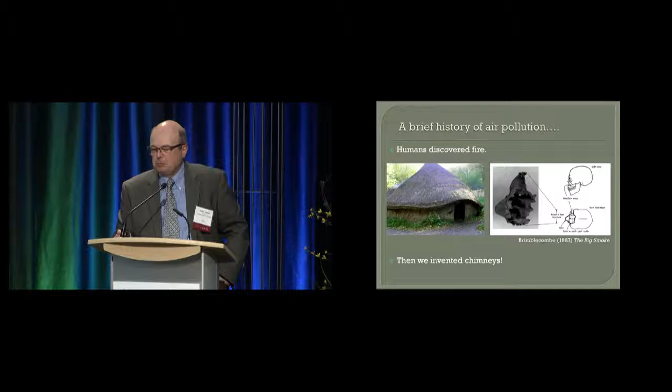Humans got a little bit more experience, and they realized maybe we should invent a vent for this smoke, a chimney, and they let the smoke outdoors. And so things improved in terms of the indoor environment. I think maybe as a species we missed breathing smoke because one of our next inventions a little bit later was cigarettes. Maybe not our finest moment.

Studies of this period that lasted several days suggest in excess of 4,000 extra deaths occurred due to the air pollution during this period. This was not the only event. There were others, including an event in the small town of Donora, Pennsylvania, here in the U.S., that was a similar sort of thing, but on a smaller population scale. And these were really a wake-up call to address urban air pollution and our exposure to that air pollution.

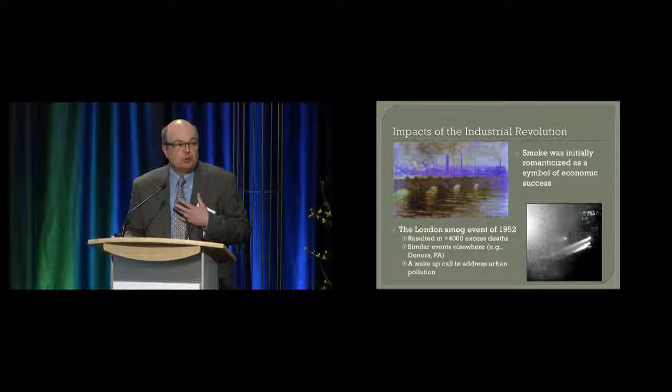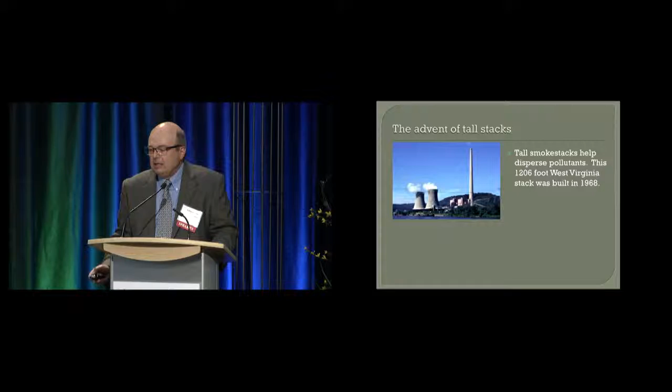This really did help to clean up air pollution in our cities, but it wasn't long after that till we started to realize that we inadvertently changed these local air pollution problems to long-distance regional air pollution problems. Last week I was in upstate New York at the International Acid Rain Conference. There was a lot of talk about the discovery of acid rain in Scandinavia and later the northeastern US and Canada in the late 1960s into the early 1970s.

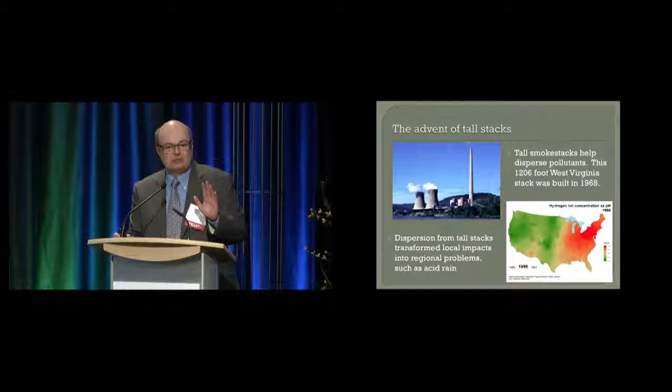And this came about primarily because we were taking this sulfur dioxide from the coal-fired power plants, distributing it over long distances. It reacts in the atmosphere to make sulfuric acid. It's deposited into ecosystems far downwind of the source. It acidifies lakes, it damages forests, and so forth. So at this point, we realized that we couldn't simply invent better chimneys. We needed to address sort of the root cause of air pollution.

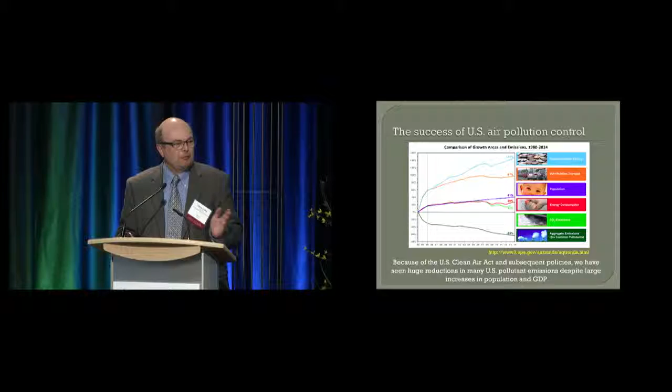So this has really been a tremendous success story in terms of improving air quality in this country, and there's very similar progress in Europe. I work a lot in China, and these days I can tell you they're on a different part of this curve, but they're going to get there too. They're starting to address some of these issues.

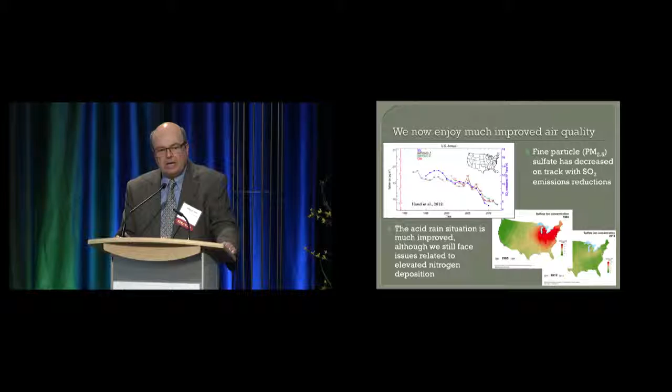And we do a lot of work with the National Park Service, and after all, when you go to a national park and you pay your entrance fee, you want to see what's there. And so they spend a lot of time trying to understand this and how to improve visibility for their guests.

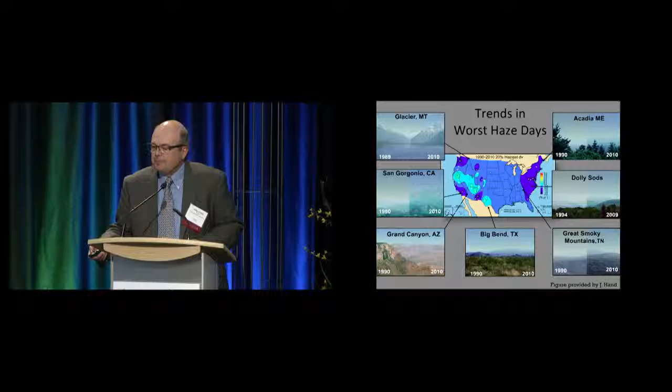So we've come a long way in terms of thinking about air pollution, and now not only do we not ignore it, it's actually a marketing tool, right, to have things be green. Especially the younger generation is really thinking about this when they're buying products. But we've seen recently some examples maybe of how not to do this. You don't want to advertise being a really green company and then you find out that maybe there was some cheating going on. And, you know, Volkswagen faces a really difficult problem now in terms of their future because they've relied so heavily on this investment in clean diesel and didn't go about it in the right way.

So that's a very brief introduction to sort of the context of how air pollution has evolved and our thinking about it has evolved. We thought a lot about conventional sources like coal-fired power plants and more recently motor vehicles. Now we're really getting to what I call the unconventional sources. And those include things that tend to be more distributed like agriculture, like wildfires, like oil and gas production, which is something that's increasingly of concern.

These are sources that are much more dispersed. There are lots of individual points of release, and we don't understand the emissions as well as we can measure, for example, coming out a single stack of a coal-fired power plant. So let's think about natural gas and what are some of the advantages and some of the potential concerns about its production and use.

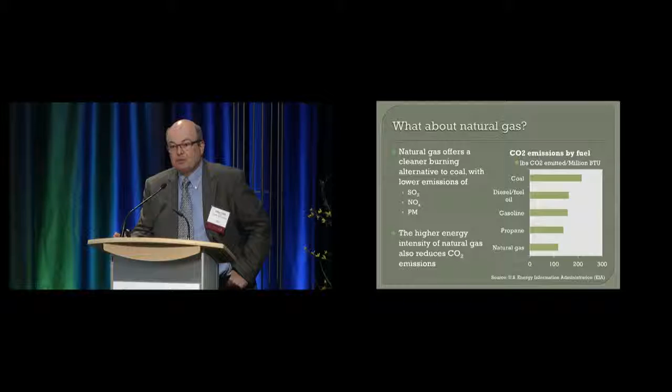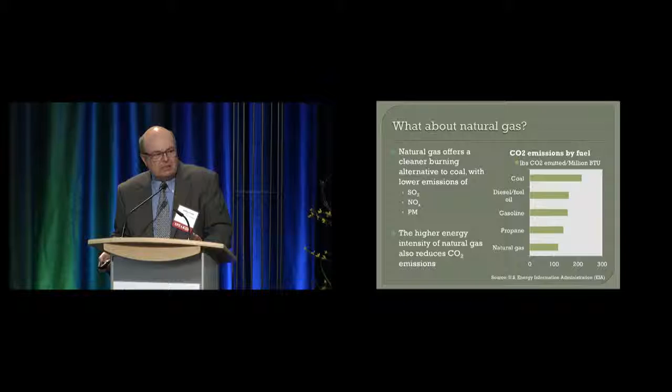Well, I don't think you would find many people that would argue about its advantages as a fuel in terms of burning very cleanly. It produces many fewer emissions of things like sulfur dioxide and fine particulate matter, or PM. Because the natural gas, the methane molecules are very energy rich, they also, when you burn them, generate less carbon dioxide than other sorts of fossil fuels. And you can see a comparison there on the right. So it's an extremely nice fuel as fossil fuels go in terms of its clean combustion.

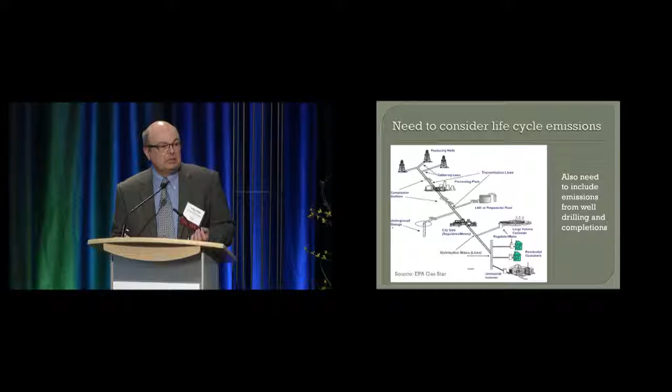But we need to think more than just the end use. We need to think about sort of the life cycle of emissions. And Rebecca talked about some of these stages up front with the drilling and the completions. And then this diagram on the left from the EPA Gas Star program shows you some of the other processes along the way from production to transmission, processing, and distribution to customers at the end of the chain. So all of these are potential points that we need to think about in terms of possible air quality impacts.

So what kinds of things might we be looking at? I'm going to break these down into a few groups. One is things that might affect climate, and in particular I'm going to focus on methane emissions. Methane is, of course, the main constituent of natural gas. It's also, as you'll see, a strong greenhouse gas, so it has a lot of potential concerns if it's leaked to the atmosphere.

I'm not going to say as much about black carbon. We don't see as much flaring here as a lot of places. We've worked up in the Bakken in North Dakota. There's a lot of flaring. You see a lot of soot coming off of those flares. Soot is also a concern from a climate forcing perspective.

I'll say a bit about what we call criteria air pollutants. These are things that are regulated by the EPA in the U.S. because of their human health effects. And in particular, we'll talk about ozone and about fine particles, which we call PM 2.5. That's particulate matter with an aerodynamic diameter less than 2.5 microns. Just think fine particles.

And then I'll say a little bit about hazardous air pollutants or air toxics. Here we're thinking about things like particulate matter from diesel combustion, different VOCs, those are volatile organic compounds like benzene, other related aromatic hydrocarbons, formaldehyde, and in some places hydrogen sulfide can be a concern, but I'm not going to really talk about that today.

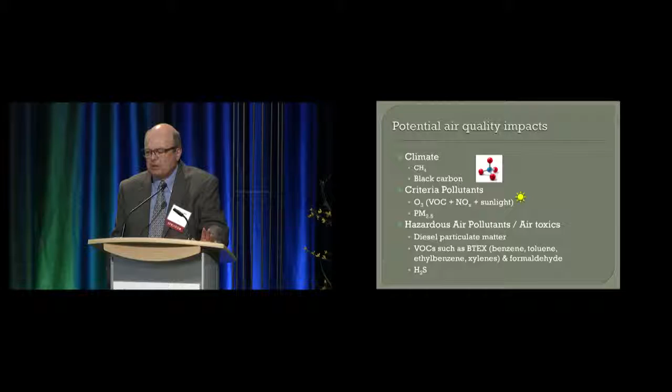So let's start with climate and focus on methane. I mentioned already that methane is a much more potent greenhouse gas than carbon dioxide. This is because it absorbs a lot more infrared radiation per molecule than carbon dioxide does. If you look at a 100-year reference time frame, the global warming potential of methane is approximately 23 times that of carbon dioxide. So when we burn methane as a fuel and convert it to carbon dioxide, it's efficient. But if we're leaking methane along the way from drilling to production to transmission, we could offset that potential benefit in terms of this being a cleaner burning fuel from a climate perspective.

You're going to hear tonight from Fred Krupp from the Environmental Defense Fund. They've been a real leader in organizing research on trying to understand the leakage rate of methane in different parts of the system that we saw a moment ago. Ramon Alvarez of EDF led a really nice paper a couple of years ago that looked at the leakage rate versus the years to climate benefit for fuel switching. For example, for a coal-fired power plant to replace that with natural gas, or a diesel vehicle or a gasoline-powered vehicle. And these figures here show you some information about that based on his estimates.

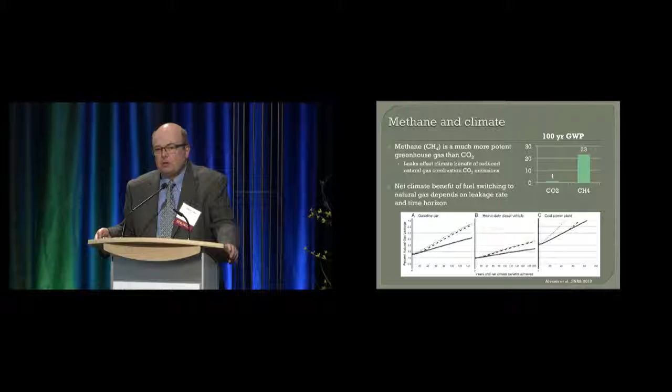And what they show is that at the left side of these figures, at the y-intercept, that tells you how low the leakage rate has to be for an immediate benefit to switching from, say, coal to natural gas. And as you look to the right, moving out, these are at different time horizons. So what this really does is raise questions about, well, what are acceptable leakage rates in terms of a climate forcing perspective for a fuel switch from one fossil fuel to natural gas in different applications. So this has been a real focus of attention over the last few years, trying to better understand those leakage rates. People have gone out and made a lot of measurements of this in the field to try and understand it.

They've used, and you'll hear these terms, bottom-up approaches and top-down approaches. A bottom-up approach is where you go out and you try and measure, sometimes even down to an individual component scale, but maybe a facility scale, and you basically add these emissions together to try and come up with the total, and you compare them to some estimate, or what's called an emissions inventory of methane from these activities.

A top-down approach is a complementary approach where you literally try and look at the concentrations, for example, in the atmosphere, and use those to come up with what the emissions had to be to produce those concentrations. So, for example, you might fly an aircraft over a basin like the DJ and look at the upwind and the downwind concentrations of methane and try and figure out how much methane was emitted in that basin. That gives you sort of a top-down constraint on the total emissions.

Now, of course, natural gas production is not the only source of methane. In Weld County, for example, we have a lot of livestock feeding operations. So there are some issues to sort out in these top-down approaches as well. Some of my colleagues here at CSU have been very involved in these methane emission studies with EDF. You'll hear more about those tomorrow in one of the panels. But I just included here one example.

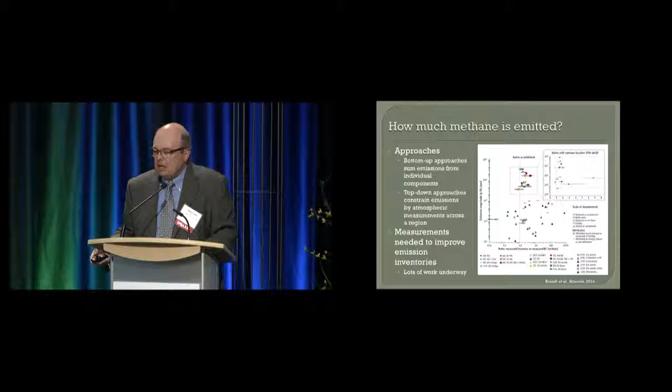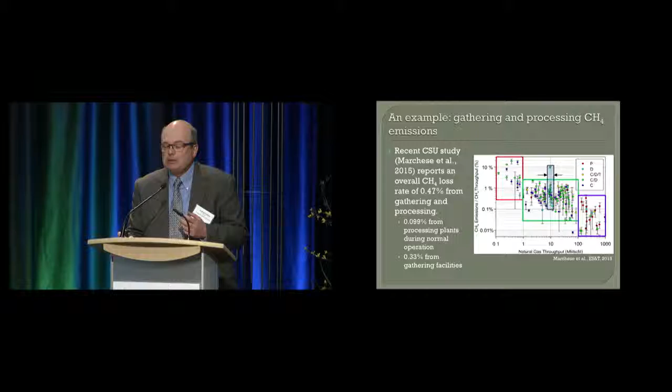And they found out in the end that there's about 0.5% of the total throughput that is leaked from the combination of gathering and processing of natural gas. And most of this actually looks like it's coming from the gathering facilities, less from the processing facilities, and that gives us an opportunity to think about maybe where to target tightening up emissions if we want to bring those leak rates down in the future.

You have volatile organic compounds which are attacked and react in the atmosphere, and they produce free radical species that react with nitric oxide to convert it to nitrogen dioxide, which the sun can then break apart and generate atomic oxygen, which reacts with O2, the oxygen we're all breathing, to make ozone. And it's really the coupling of these cycles that can generate very high concentrations of ozone.

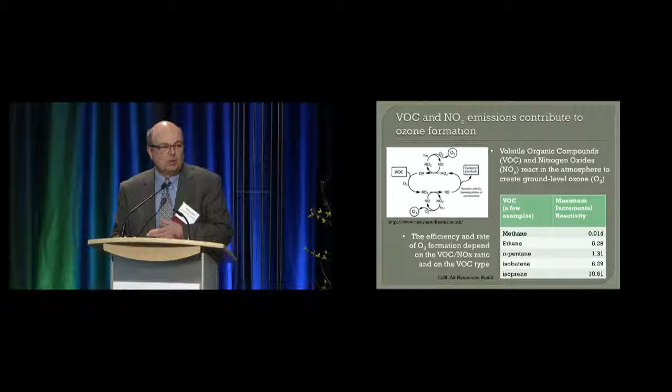So when we think about sources of VOCs to the atmosphere and how they affect ozone, we need to think about not only the amount of those VOCs being released, but also their composition, which affects how much they contribute to the ozone chemistry. If you go around and you take a look at different air basins and look at the VOCs that are present there, you can get an idea about the influence of different types of sources.

We know, although we don't understand fully yet the extent, that these VOCs and the NOx that come from oil and gas production and use contribute to ozone production. We don't know exactly how much that is, and that's a very active area of research. Some of you might have seen the summer before last a lot of aircraft flying very low over the Front Range. You wondered what those were. Those were research aircraft that were trying to study this issue about ozone production from all different kinds of sources here on the Front Range.

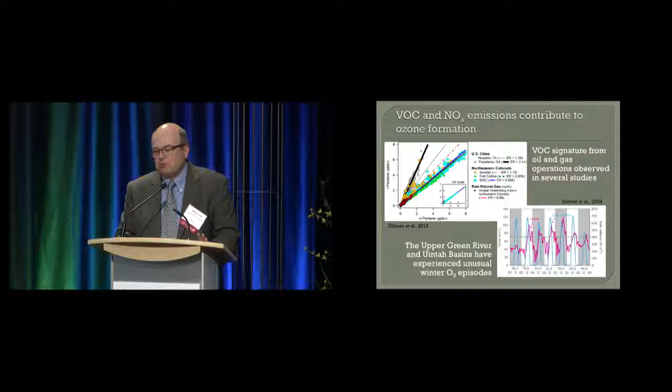There are some areas where we have very clear evidence of strong impacts of oil and gas production on ozone. One is in the Upper Green River Basin in Wyoming, where there were severe winter ozone episodes. This is a region without many people, but in the winter you have a very shallow mixed layer. You have snow on the ground, you have sunlight, and so you trap the emissions very close to the ground. You have reflected sunlight, which almost doubles the illumination, and you drive a lot of this photochemistry very quickly, and you can generate high ozone concentrations as shown in this diagram.

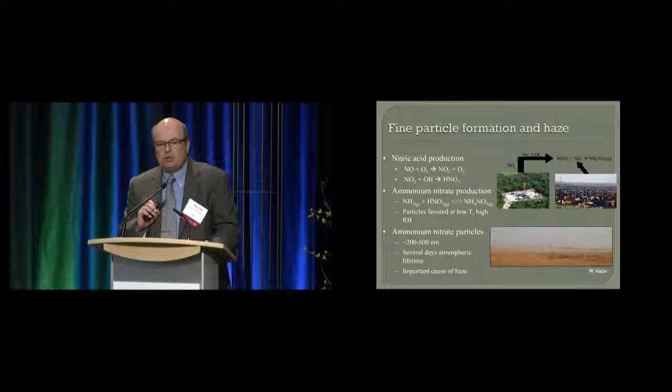Another issue that is of concern potentially is the formation of fine particles. These, remember, are damaging to human health, but they also impact things like visibility in the atmosphere. One of the main areas of concern is emissions of nitrogen oxides. Those can react in the atmosphere to make nitric acid. These are both gas phase compounds. But the nitric acid can react with ammonia, which comes mainly from agricultural sources.

Ammonia is also a gas phase compound, but when it reacts with nitric acid, we make small particles, smaller than a micron in diameter. These have very long lifetimes in the atmosphere. They're very similar in size to the wavelength of visible light, which turns out to mean that they are very effective at scattering light and reducing visibility. So you can see, for example, here this photograph from the Bakken region of this haze that's sitting over that region in the wintertime.

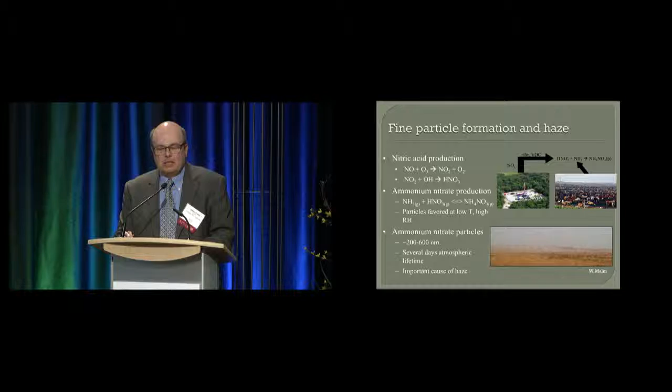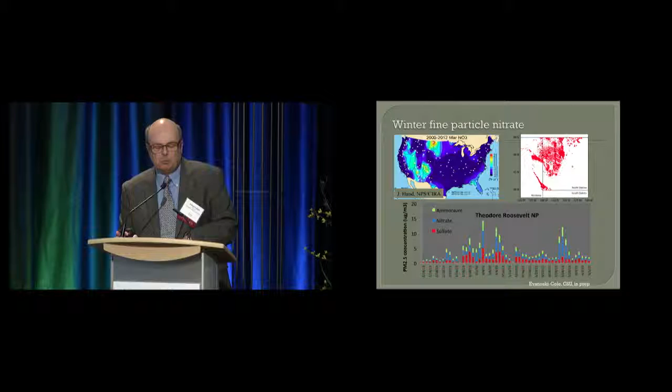Let me just close before I turn things over to Doug by saying a couple brief things about air toxics. Again, here we're concerned about things that are carcinogenic or in some way harmful to human health. This focus is often on gas phase compounds like benzene, but also particulate matter from diesel is known to be a health hazard as well. These emissions certainly vary by operation type.

We're actually in the midst of two big studies looking at air toxics emissions from different stages of oil and gas activity, for example, drilling versus fracking and so forth. Some of these compounds come from the deposit. We heard already about how benzene exists in the deposit as part of the oil, and so some of that can be released from there.

Some are released from other sorts of ancillary activity like diesel generators or natural gas power generators that are providing power on the site for drilling and fracking and so forth. But they also have other sources like the car that most of you probably drove here today, which is emitting these kinds of things as well. When you go to the gas station, there are emissions of these kinds of compounds.

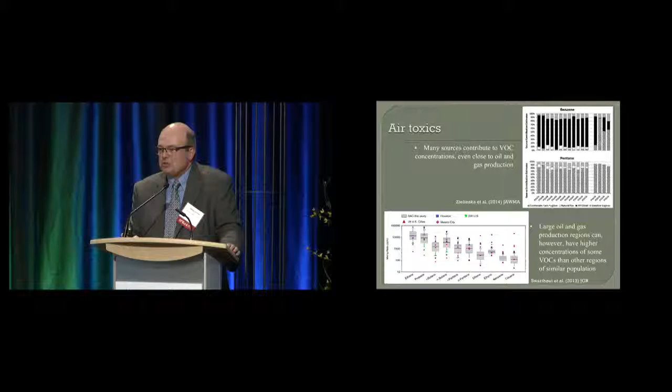And so this is an area of active study, including the work we're doing to try and better understand the source strengths of different types of sources to these compounds that may be of concern as far as human health. So I think I'm going to wrap things up there and leave some time for Doug to talk a little bit about mitigation and other issues from the industry side of things.

Oh, there it is. Well, howdy. My name is Doug Jordan, and I'm with Southwestern Energy. I'm the director of our corporate environmental programs. Informally, I'm the company airhead. I've been a practicing environmental professional for well over 30 years, so I'm also known as Air Jordan, and I am older than Michael Jordan, so I think I can claim that title over him.

We'll move into a discussion on mitigation and air emission controls.

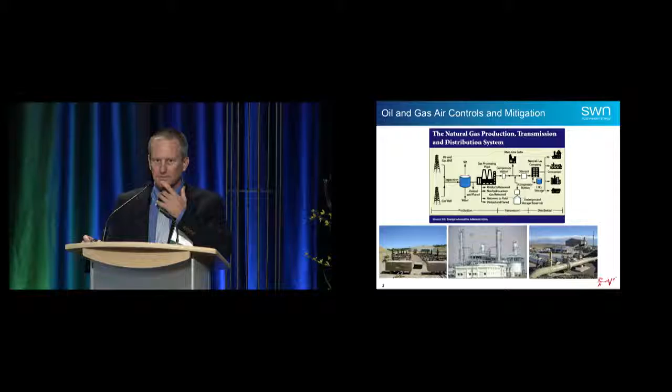But also, I got to spend about 4 weeks recently out in the field with a couple of individuals from Colorado State University. Clay, who just received his PhD, his cohort Tim, who's still waiting on his PhD, and their sidekick Cody, who just started up his master's program. And after spending several weeks with them, I thought, if they're coming to this thing, maybe I better use pictures, because pictures are worth 1,000 words. So Tim, Clay, thank you all.

So we start off here with a drill rig. This is what we call our rocket rig. And SWN is not the only company to do this. I think the majority of the drilling companies are starting to move this way. Before we have the well that can generate emissions, we have to drill the well, as Ms. Rebecca pointed out earlier. Initially, the drill rigs were powered with diesel fuel. You burn diesel to basically create electric power to operate your drill rig.

Well, what we've done here is we have converted our engines to what they're called bi-fuel, so they can burn both diesel and natural gas. The benefit of burning natural gas is that you use less fuel, but you also reduce your emissions. And really what you're reducing are your criteria pollutant emissions, your NOx, your CO, your VOC, and your SO2. So before we even have a flowing well, we're actually implementing controls on the drill rig to minimize the emissions.

Here's a picture of the completion flowback. So Ms. Rebecca talked about how you drill the well, you frack the well, and then you begin the flowback. And that's where you start bringing back the water and the sands that don't stay in the well bore, and you're starting to get that gas to flow back. And there's a couple of different scenarios that we'll look at.

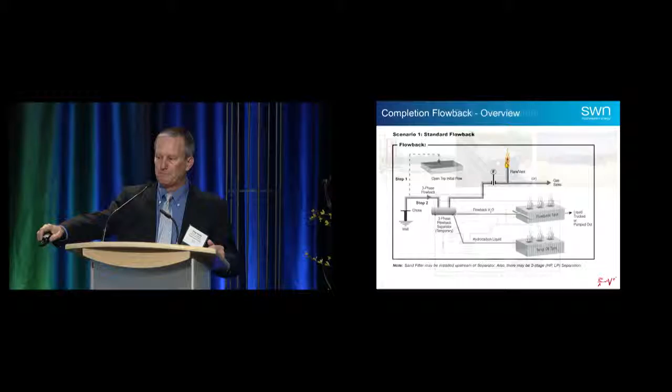The first one, and this is really the old-fashioned way, it was not uncommon that when you started your flowback, you would take the flowback possibly straight into a tank. And so what you see there is essentially a frac tank, and what they have on it is what they call a gas buster. Well, the gas buster is nothing more than a device that diverted the water into the frac tank and the gas up into the atmosphere. So you were venting anything that was coming out of that well straight up into the atmosphere, no controls.

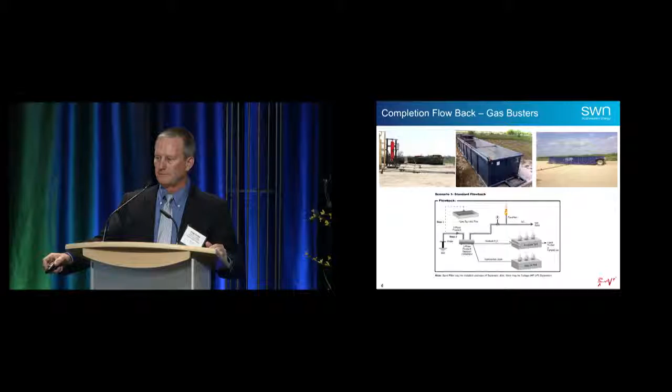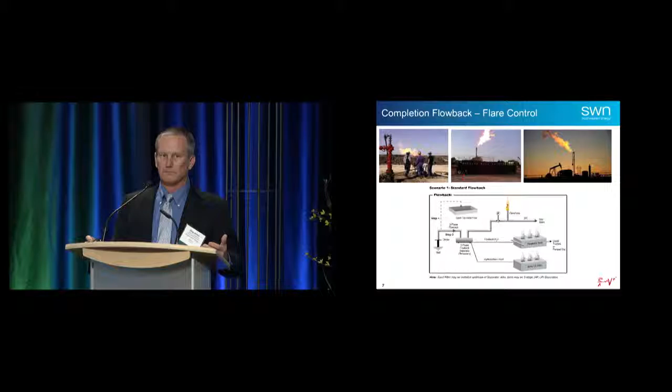So the next step on reducing emissions from the flowback is what they call reduced emissions completions, or what people also call green completions. The EPA in 2013 passed a rule, the NSPS Quad O standards, which really require the reduced emission completion technology to be applied to gas wells. And this year, and it's open for comment now, they have proposed to expand these REC requirements to oil wells that are hydraulically fractured as well.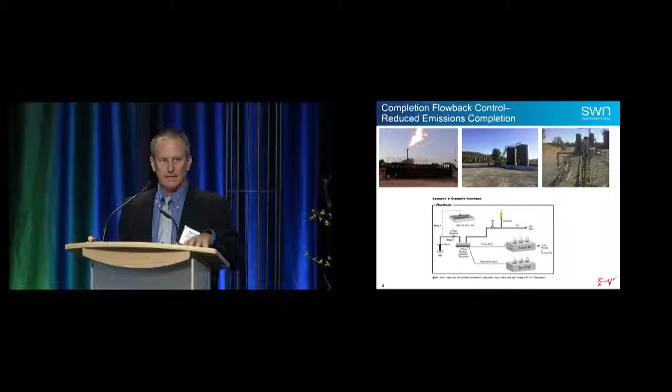So what they're really going after is no more just that direct venting to the atmosphere. So the REC control requirements that we have are that you initially begin flow, you can vent for a period of time, but then you are encouraged to route your gas to the sales line as quick as possible, but in between, you can use a flare if you need to. So the REC provision still allows the use of a flare to be compliant, but again, the emphasis is capturing that gas and getting it into the sales line so that you have no emissions.

One of the things that we were able to do at Southwestern Energy is what we call the REC Plus, or what we call our Southwestern Gas Capture. And the Fayetteville, which is where our primary production is, is what we call a low pressure basin. It's like 40 to 60 pounds on average. So there's not a lot of energy down in the ground to really help bring that water and sand back up.

So what we do is we bring in a compressor engine, typically about a 1500 or so Caterpillar engine, and we actually use gas available at the site from one of the other wells to basically pump the gas down into the reservoir and energize it and pressure it up. And that way, instead of flowing back at 40 or 50 pounds, we're closer to 1,200 pounds when we start that flowback of the water, the sand, and gas.

As that mixture comes up through the Christmas tree, and so I'm starting out the picture in the upper left, it comes out of the Christmas tree, goes to the next picture to the right. We run it through a sand separator, and the sand separator is there to drop out sand because we really don't want to run that through our equipment and through the system. I mean, it's great sandblasting material, but you don't want to eat up your equipment.

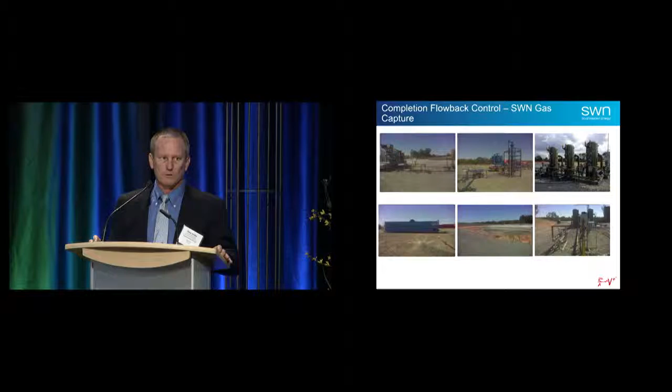From that sand separator, the gas liquids go into the separators. We're in the top right, and those are what we call our fat boys. Those are oversized separators that we installed that really allowed us to capture that gas and water, that high flow in the initial phase, and be able to separate the gas and take the gas straight into the sales line. And then the liquids off the bottom of the separator, we route to a frac tank, which is what you see in the lower left corner of the picture.

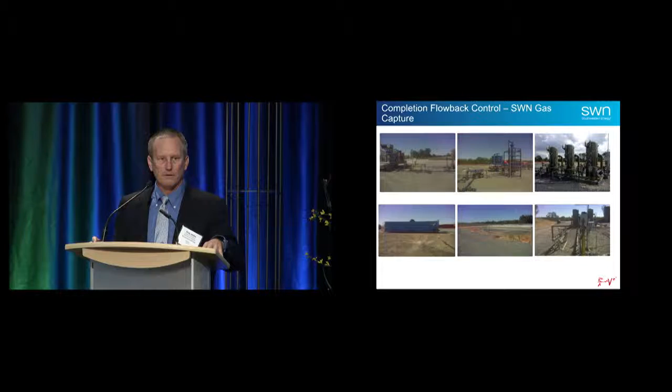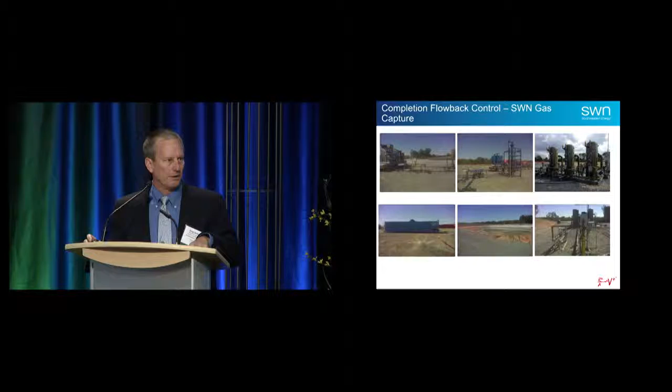And we run that liquid through the frac tank so that we can measure how much water we're getting, and we can control the water as it goes into a surface impoundment, which is what you see in the middle and the bottom. And we do that so that we can collect and reuse and recycle that water in future frac jobs. And then from those fat boy separators, the gas is routed to the meter, which is the picture at the lower right. That's where it goes into sales. And so one of the things that's different about the gas capture that we employ, you do not see a flare here. We don't use a flare with our reduced emissions completions in the Fayetteville Shale.

And then this is some information that we have shared with the EPA Natural Gas STAR program. We've been a participant since 2006. And we were actually the production partner of the year back in 2011. And it was our early implementation of the reduced emissions completions or gas capture that really helped us achieve that recognition and the award. The Marcellus Shale up in Pennsylvania is a higher pressure formation, more in the 500 plus pound range. Those wells flow a lot higher. So what you see there is a big difference in the numbers.

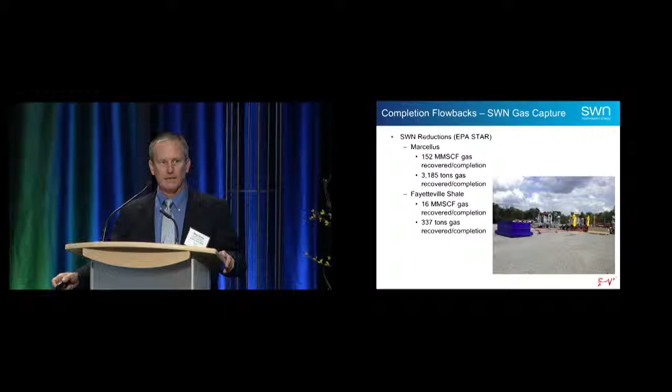But basically by employing this gas capture technology, and it's kind of all packaged there in that picture to the lower right, in the Marcellus, we estimate that we've recovered over 152 million cubic feet of gas by employing this technology, which is over 3,000 tons of gas. And in the Fayetteville, we recover over 16 million, and I apologize, that was wrong. It was 152 million cubic feet of gas per completion, not in total. And the 16 million is for the Fayetteville. Again, lower pressure, less production on those Fayetteville wells, but still a significant reduction of what in the past we used to send to the atmosphere.

One of the items, and I'm kind of trying to go through the chain from the wellhead more towards processing, is pneumatic controllers. Pneumatic controllers are devices that use natural gas to open and close valves. They're used for liquid level controllers, process controllers, et cetera. And they've been used for a long time because gas is available at a well pad, at a compressor station, at a transmission station. And remember that a lot of these facilities are located in areas where you don't have power available. And so gas is there and it's easy to use.

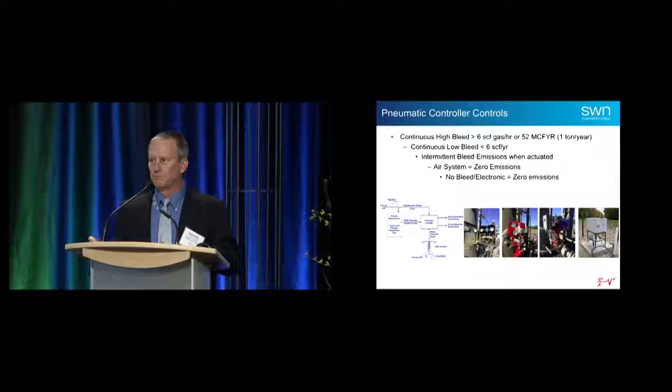The next source that we have are what we call pneumatic pump controls, and at a wellhead, you will typically have chemicals at your site, and you will inject typically corrosion inhibitors or algicides down the wellbore to keep algae from growing or corrosion from forming. Or you also use methanol, and the methanol you typically use more in the colder months, to keep everything from freezing up. And again, typically those pumps are driven by natural gas. And if you use the EPA emissions factor for these chemical pumps, they estimate 13.3 standard cubic feet per hour whenever they're operating.

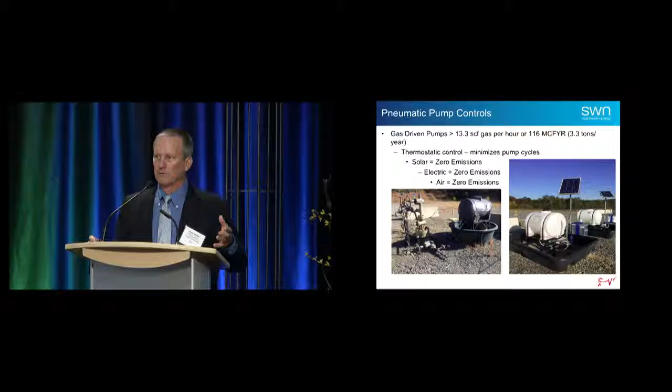Now, if it's produced water that's going to a tank, there's probably very little emissions associated with that storage tank because it is supposed to be primarily water. You could have some methane carryover, some minor hydrocarbon carryover, but it's going to be produced water, and those typically aren't controlled. But in areas that are rich in gas where you drop out condensate or otherwise natural gasoline, or in areas where you are going after oil, you are actually putting hydrocarbon liquids into that tank, and that's where you have the potential to have VOC emissions from those storage tanks.

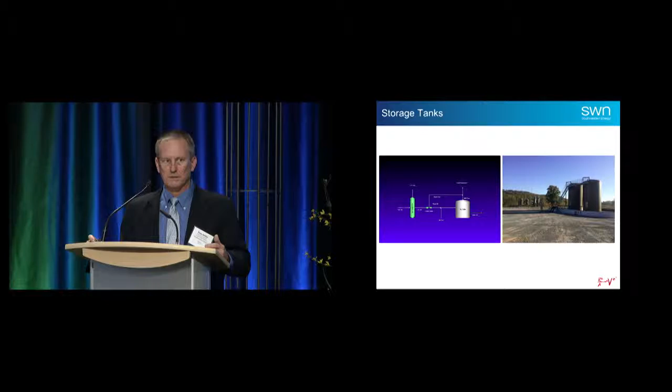So one of the control devices that's really common for your larger storage tanks handling pretty large volumes of condensate or oil are what they call vapor recovery units. And the NSPS Quad O standards that were promulgated back in 2013 essentially require this type of control on tanks that have more than 6 tons per year of VOCs, okay?

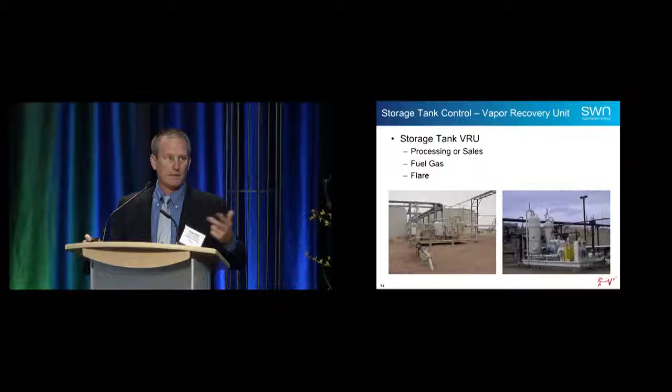There were also some NESHAPs, subpart HH and subpart HHH rules that were promulgated back in the 1997 timeframe that went after the air toxics, the benzene, toluene, ethylbenzene, xylenes that could come off of big condensate tanks that also required similar controls. So the VRU is there to actually collect the vapors off of the storage tank as opposed to them being vented to the air. And then it is either routed to processing or to the sales line, fuel gas, so it can be used as fuel for the facility, or it might be sent to a flare.

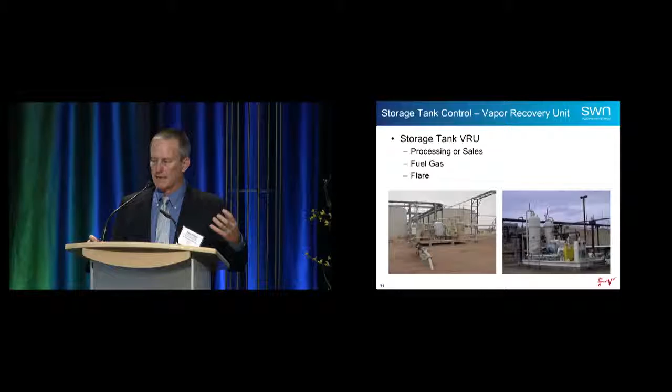And these are just two different pictures of what a vapor recovery unit looks like. It's basically a separator to drop out any liquids, and then you have typically an electric powered rotary vane or screw type compressor to compress that captured gas and move it to the next step.

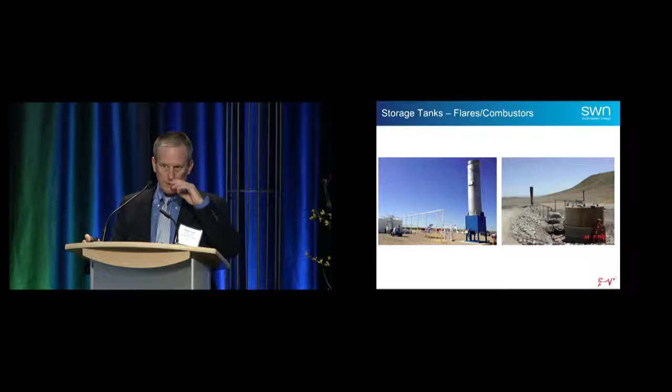The other type of control that you see for storage tanks, and these can be downstream of the VRU or they can just be downstream of the storage tank, again, depending on the volumes and the pressures, are what they call flares or combustors. And so the picture on the left is a big enclosed combustor connected to some sizable tanks. The one on the right looks more to be like a well pad tank and a much smaller flare. So again, for storage tanks, it's by and large either vapor recovery and/or flare/combustor.

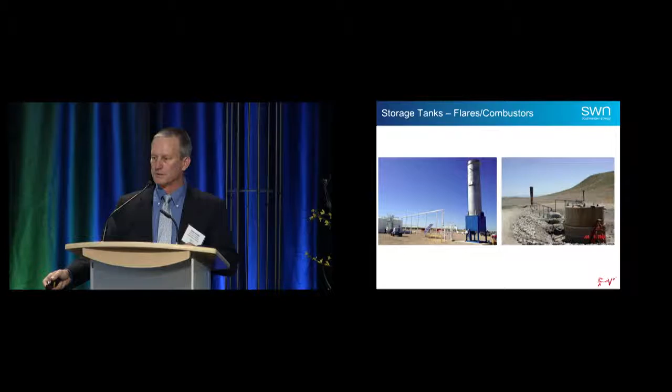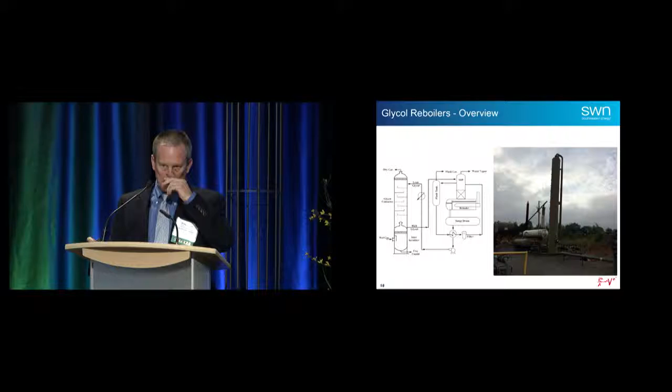Glycol reboilers are what are used to get water out of gas. So whenever the gas is coming out of the ground, it's got water in it. That's not good to send to the pipeline. You can't burn it in your house. So what you do is you run that gas through a glycol reboiler. And so the process diagram on the left has the initial tower that the gas goes through. Glycol is ran through there to pull out the water. In the process of pulling out water, it also pulls out or absorbs methane and other hydrocarbons, especially BTEX.

Once the glycol comes down to the bottom of that tower, it needs to be regenerated. So you send it over to the reboiler. And so the reboiler is just like a big heater with tubes inside of it, and you're heating up those tubes, and what you're doing is as you're running that glycol through there, you're driving out those gases, okay? And typically those gases are vented out of the still column vent.

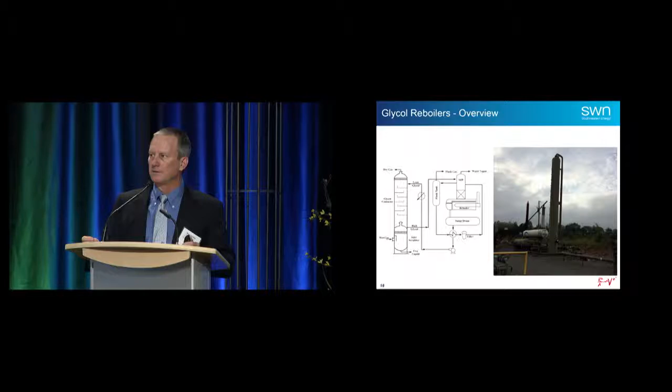And it's kind of hard to see, but the picture to the right, the really tall device, that's the scrubbing section. The two horizontal sections, the one that's more silver is the reboiler. The one that is lower to that is a flash vessel that we'll talk about in a minute. But then you see two stacks coming off of it, one that's got a cone on it, and that's the firebox, the emissions from burning fuel to heat up that glycol come out of that. But then the other one with the tube coming off the top, that's the still column vent. So that's the vent that is really where you're looking to have potential methane, VOCs, and air toxics emissions coming from.

In terms of controls, there's some controls you can do on the process side to minimize your emissions from the glycol reboiler. Probably one of the easiest things to do is to install a flash vessel. And so here, the flash vessel is the upright vessel on the left side of that entire unit, with the reboiler being the horizontal unit. And what you can do is you can route your rich glycol into that flash vessel before it goes into that glycol reboiler. And what it does is there's a pressure drop that occurs, and it allows the gas to come off before it goes into the reboiler and then just goes potentially into the atmosphere.

Likewise, you have a Kimray pump that is used to circulate that glycol between the scrubber and the reboiler. And it, too, has VOCs entrained in it. So you can run that gas through that flash vessel to, again, strip out that gas before it gets into the reboiler and goes to the atmosphere. The gas that's recovered from that flash vessel can be recovered as sales, it can be used as fuel gas, or it might go to a flare or combustor.

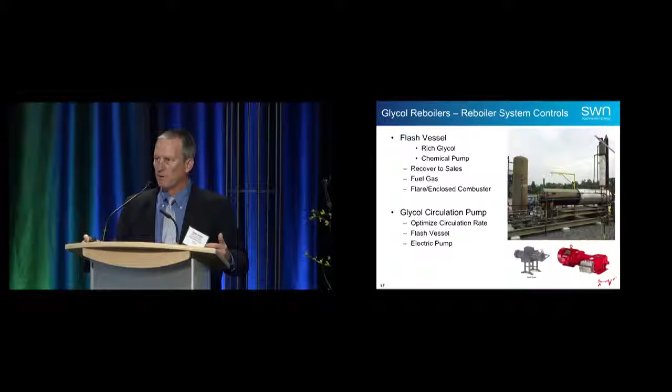Another process improvement you can do is you have what they call a glycol circulation pump. The most common one in the industry is a Kimray pump. It uses pressure from the system to drive it, okay? But it sends that liquid that's rich in gas potentially to the flash vessel or into the glycol reboiler. So what some people do is, if they have electric, they'll install an electric pump. And with that electric pump, you're not using that liquid, you're not generating an additional load in that reboiler, which creates more emissions.

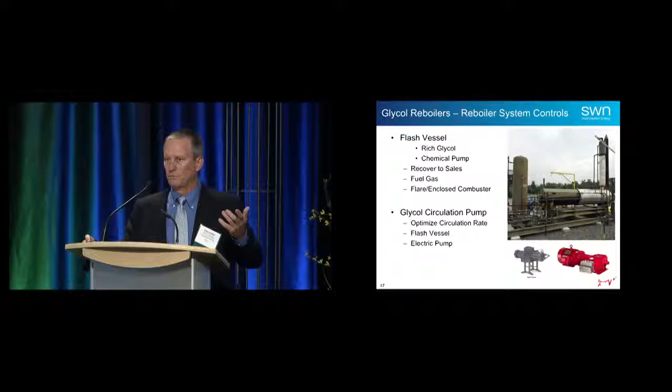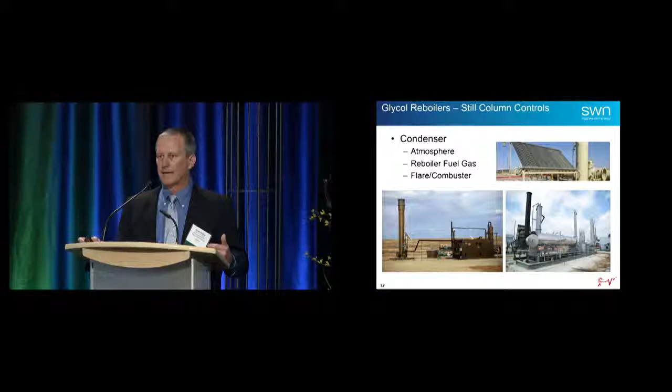On the still column itself, basically, the first thing you look at doing is putting a condenser on. What you see in the upper right is a picture of a condenser, and there's also a condenser on the lower left. They look like a lot of lines, pretty much like a radiator. These were really first required by the NESHAP rules back in '97. And since they were targeting benzene, toluene, ethylbenzene, xylene, a lot of people call them BTEX busters or BTEX eliminators, even if they're at a site that is really more for VOCs. With that condenser, you could also route the gas, if you're not recovering everything out of there, to a flare for combustion.

On compressor engines, Colorado State, you ought to have a lot of pride in your engine testing lab. You all really advanced a lot of the knowledge about combustion chemistry in engines and really helped advance the controls. You have rich burn engines, which really tend to burn more fuel and create more air pollution, and lean burn engines, which are very lean. You use pre-combustion chambers, high energy ignition systems, high pressure fuel injection, all projects that were worked on at CSU to really help lower things like NOx emissions.

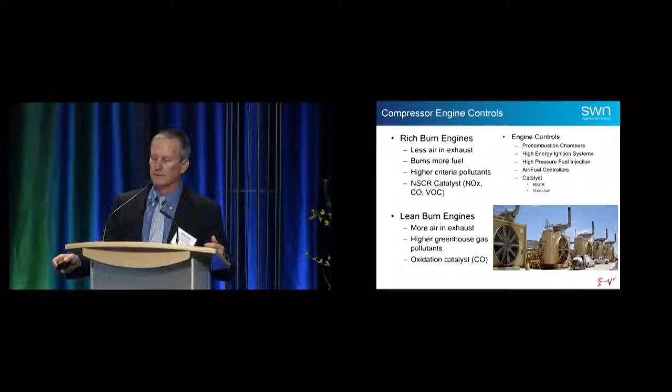You have the opportunity to install catalyst. On the rich burn engines, you use non-selective catalyst, which reduces NOx, CO, and VOC. And on lean burn engines, you use an oxidation catalyst to go after CO. Okay. The last thing is kind of the newer wave, and that's going after the equipment leaks, where people are using these optical gas imaging cameras to go out and find leaks. So that's one of the newer technologies to really go after methane.

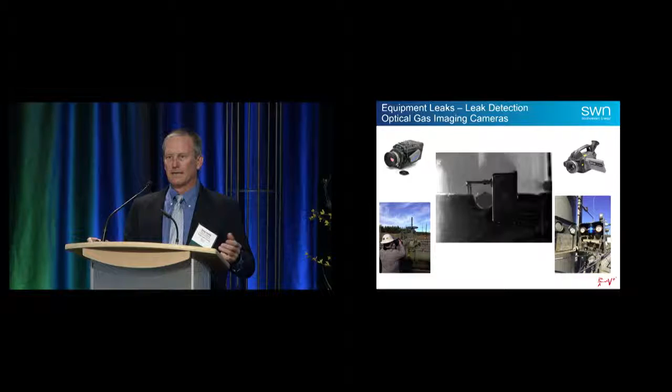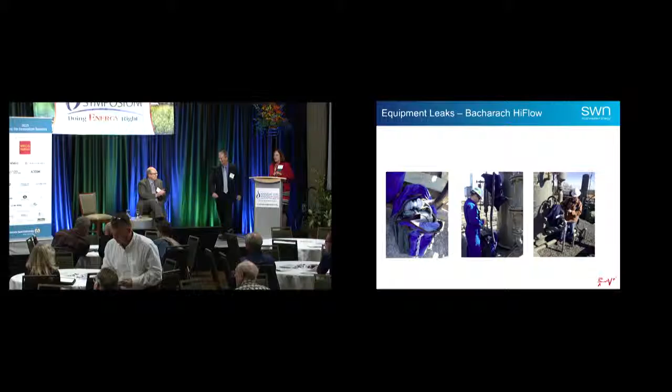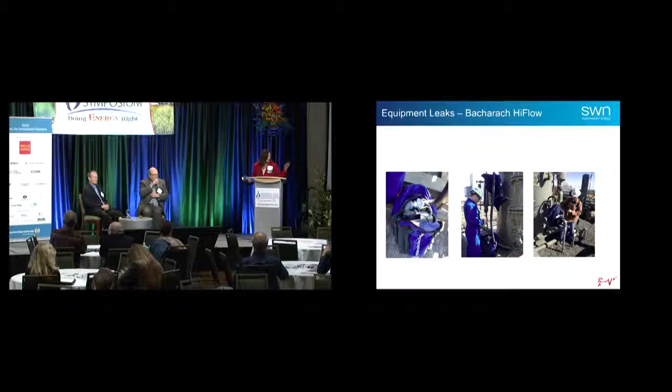I wanted to leave a couple minutes for questions. Is there anybody in the audience with a question? If not, I have one on the event app. I think there's one over there, Jane. We're going to try to stop in about 2 minutes, so we don't have much time. It should be on. Okay.

I'm Wes Wilson. I have a question for Dr. Collett, if we could follow up a little bit more on the methane leak and climate. I think you'll find that the EDF saying it needs to be less than 3.2%, they've updated that because they're not just looking at the 100-year heating factor. Probably more importantly, though, when CSU came out with the low leak rate of less than 0.5%, you're well under either one. But that contrasts significantly with what was found from the top down of some 4%. And I'm wondering if you're aware that the inventor of the instrument, Touche Howard, says it's not being used properly and it's consistently recording low concentrations when they are higher.

Jeff, do you have an answer? Yes, there are a lot of parts to that question. First, let me say that the study that I reported on, the 0.5%, is only the gathering and processing. So it's a piece of the overall supply chain, and we need to integrate the total loss across all of that. So you wouldn't necessarily expect that to agree with the top-down, but still there is a disagreement between bottom-up and top-down estimates that we don't fully understand.